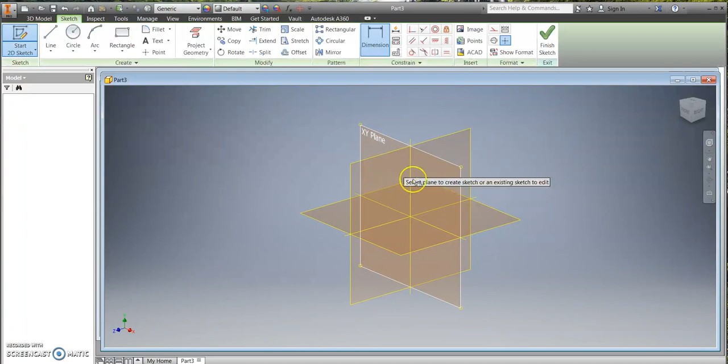We want a millimeter part because that's what we do our measurements in, so the standard millimeter IPT file. Our workspace is going to open and we're going to start by creating a 2D sketch on the XY plane. I will quickly draw a rectangle and dimension it. My dimensions were 32 millimeters by 16. You may have had a block that was longer or shorter, so that may be subject to change.

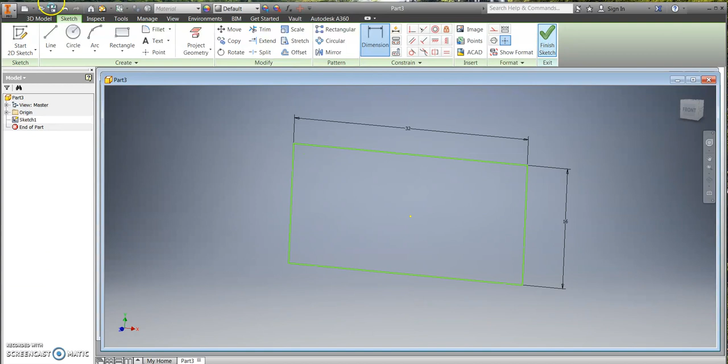Now the depth of my Lego was 10 millimeters, so when I extrude, I'm going to be extruding for 10 millimeters. This went ahead and extruded for 10 millimeters already, so I don't need to change that, but if it was too big or too small, that's how you could do that.

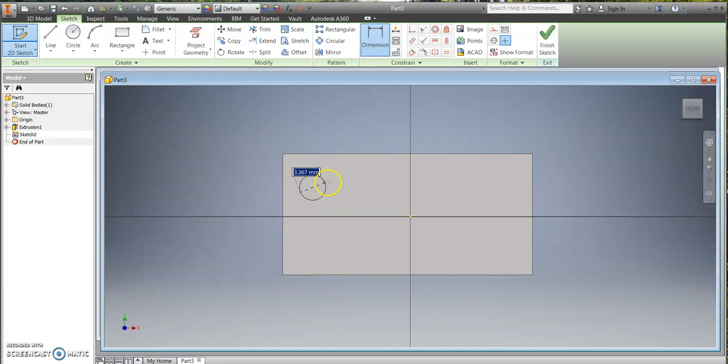So now I'm going to go ahead and create a second sketch to create the studs on top. I'm going to start by creating a circle, and I'm going to dimension it to 4 millimeters because that's what I measured, so 4 millimeters.

Then I'm going to go ahead and start to kind of accurately place it. It'll just help me get the rest of the studs in place later on. So I'm going to dimension from this edge to this circle. I know they're both selected when they're both blue. So I'll start with that edge.

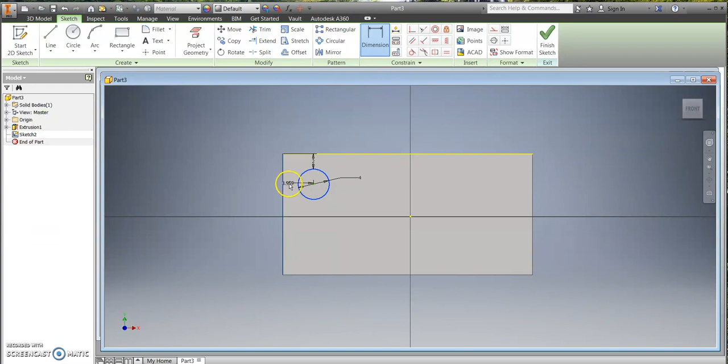So I measured 2 millimeters from here, so I'm going to select 2 and it's going to move it over a little bit. Make sure that it's blue. Now this is asking me to dimension from the center point, but I can do the simple math. If it's 2 millimeters over here and 2 over there, I'm going to dimension this one for 4.

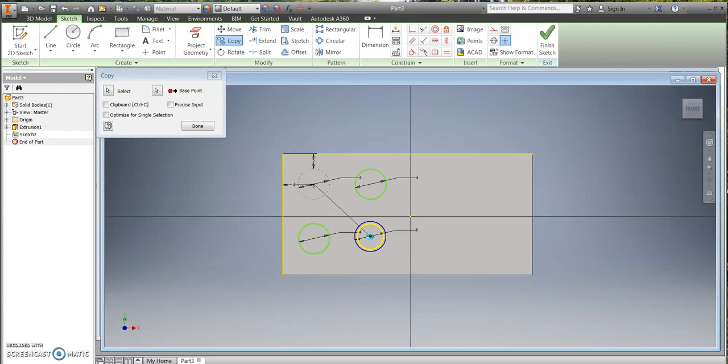So now I've approximately placed where I want the stud to go. I'm going to go ahead and use the copy tool to place the other 7 studs. I will go back through and dimension them, but I don't want to have to create 7 individual ones that I have to then also dimension. So I'm just going to go ahead and roughly place them. Again, I'll go back and dimension them, but at least I don't have to create 7 more studs with dimensions. So I'm going to use the escape tool to exit out of that.

And so now I'm going to grab my dimensioning tool again. I measured 4 millimeters across this way and 4 millimeters across that way, with 2 millimeters being all around the outsides. So I'm going to start by grabbing this, and again I'm going to go for 4. I'm going to make sure that it's dimensioned from this side the way that we want. We're going to hit 4.

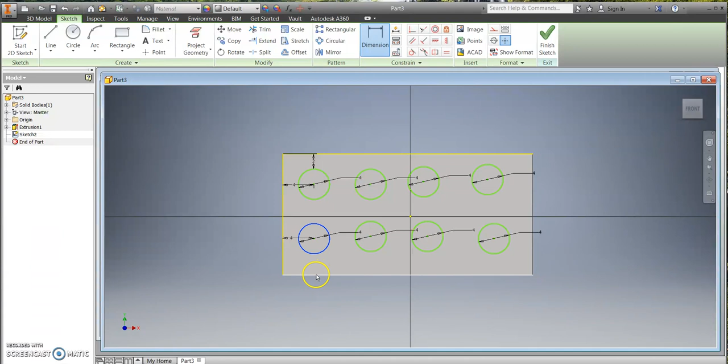And make sure that we've got this right in here, and again it should be 4, and we'll hit accept on this one. That may pop up every once in a while, don't worry about that. So then I'm going to go ahead and start dimensioning between other circles as well. Now again, it's asking me to go between their 2 center points, so I've got 2 millimeters here, 4 in the middle, and 2 over here, so I'm going to make that 8.

And it's placed it a little further away, and so I'm going to go ahead and start to dimension in between these as well. Now again, this is not going between the center points, so I'll make this 4. Start to dimension between all of these, and basically for the rest of the time I'm just going to be doing a lot of dimensioning, just getting everything placed exactly right. Set that for 4, and one more up here, and again it's basically just a repetitive process at this point, and that may pop up every once in a while.

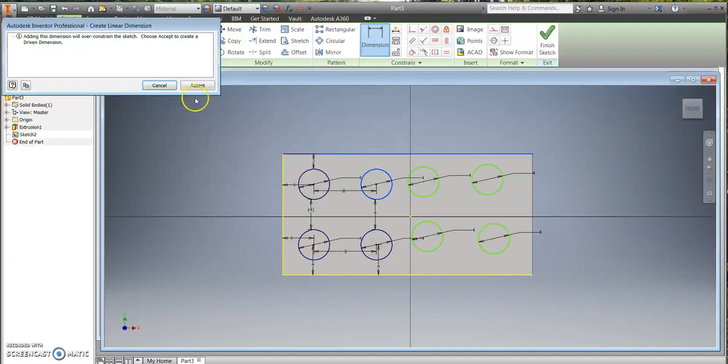And so you just have to look, is it asking you to dimension between the 2 sides or the 2 center points? So you may have to change your numbers up a little bit for that. Make that 4. Make that 8.

And again, when you're dimensioning, you know you have both items you want to dimension between when they both have turned blue. So I've grabbed that, and I've grabbed this circle. I want there to be 8 millimeters in between those 2 center points. So I can start to do those final numbers, and 4 in between here. And again, it's just a lot of dimensioning, but this is how you turn out really, really precise work. Oh, that should have been a 4 because it asked me to dimension from the center point, and it pops it down back where it needs to be.

Perfect. And obviously as you're doing this, if something doesn't look right, go ahead and try to make your final adjustments. And accept.

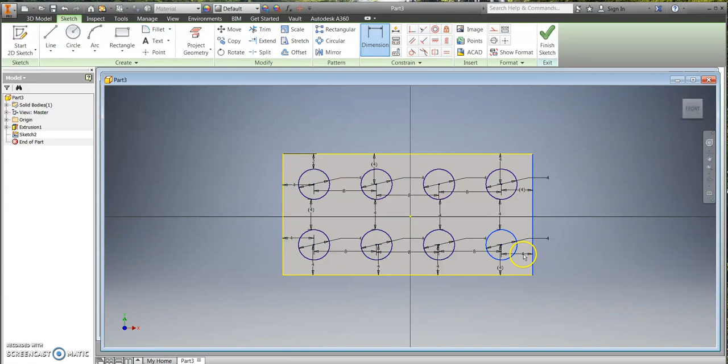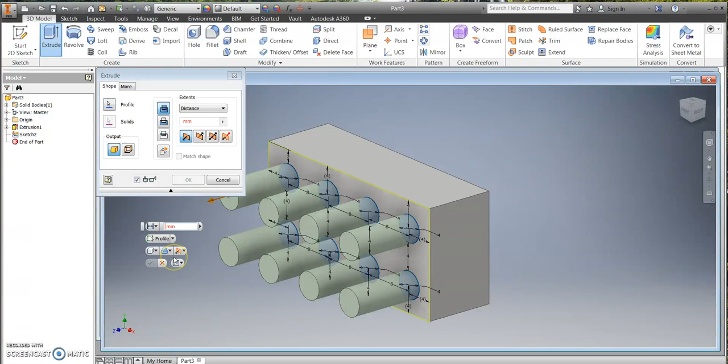So now I've got everything dimensioned out the way that I want it to be. I can hit Finish Sketch. And then when I go to extrude, I need to very carefully click on each circle, not the area around it, or it'll extrude the wrong part. And because I'm extruding this on one sketch, I only need to change the measurement once. When I measured, this was 2 millimeters over here. And now I have a beautifully dimensioned, basically perfect Lego block, exactly like I measured.